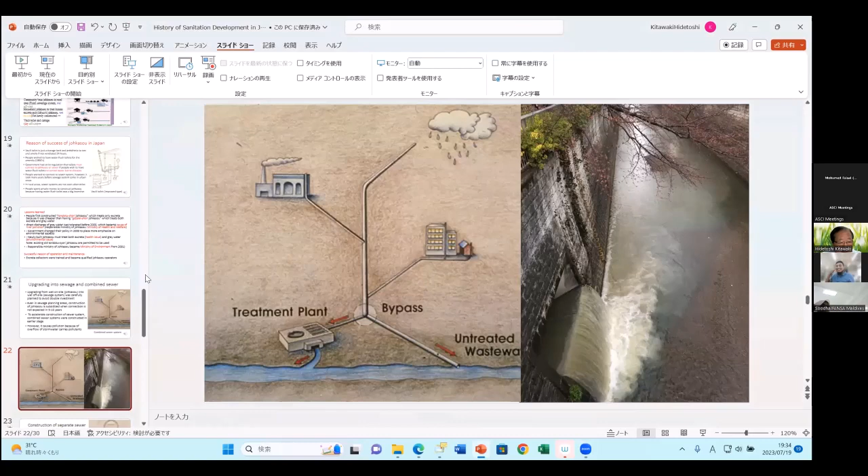Okay, thank you for the introduction. I hope everybody can hear me, right? Yeah, we can. Okay, so let me share my screen, and I'd like to make a presentation about the history of sanitation in Japan. Let's see. Yes. Here.

Okay. Now, my topic today is the history of sanitation development in Japan, and I was requested to talk something about the situation in South Asia. However, the other people already know more than me, so I add some very specific points about South Asia because I visited Bangladesh 30 times. It's a long time. First, I'd like to take the opportunity to talk about 30 minutes about the history of sanitation development. I'm from Toyo University. I was working in Tokyo University, but now I'm a professor at Toyo University. What I'm going to talk about today is these things.

Well, I'm basically a sanitary engineer. However, a sanitary engineer is talking about history, so this is a kind of strange thing. But to begin with, I'd like to talk about the historical classification in Japan from ancient times, early modern times, etc., up to now.

Then sanitation alternatives, current sanitation alternatives in Japan, and the relationship with the history. Then I'd like to talk something about the sanitation ladder and South Asia cases. Okay, now coming back to the history.

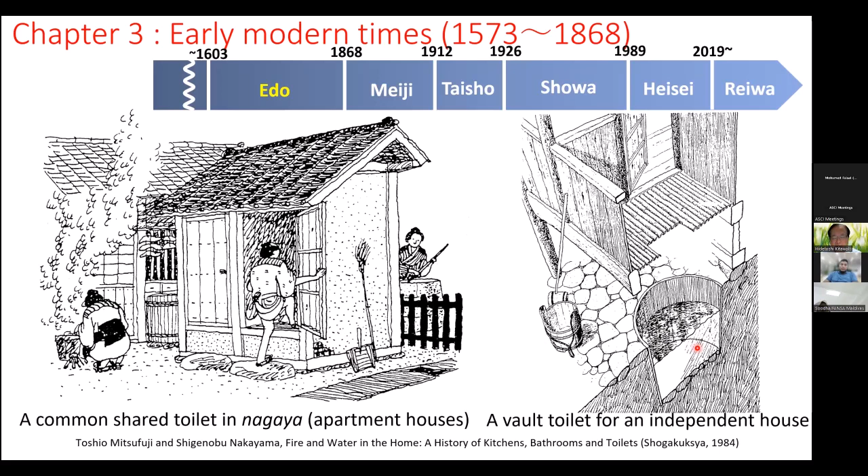And points learned from this time. Vault toilets without leaching were constructed because human excreta was a valuable commodity, as I said. Then, fortunately, there was less groundwater pollution. And traders of human excreta purchased excreta, like this. They were purchasing human excreta and bringing it by boats or other means to the farmland, and these vendors were selling human excreta. So it was a commodity.

And this is a very, very important aspect, which is leading to now. Please remember this word, jokaso. This is Japanese, and the meaning is this. Joka means purification. So means tank. And this is a purification tank of human excreta and gray water. And who maintains jokaso? This is an on-site sanitation system.

And if they introduce an on-site system, somebody should maintain it. Of course, partly the users maintain it. However, there should be some professionals who manage the on-site system. So these people, traders of human excreta, existed in large numbers, and they were trained, and they got qualifications as jokaso maintenance people, and they are maintaining jokasos up to now.

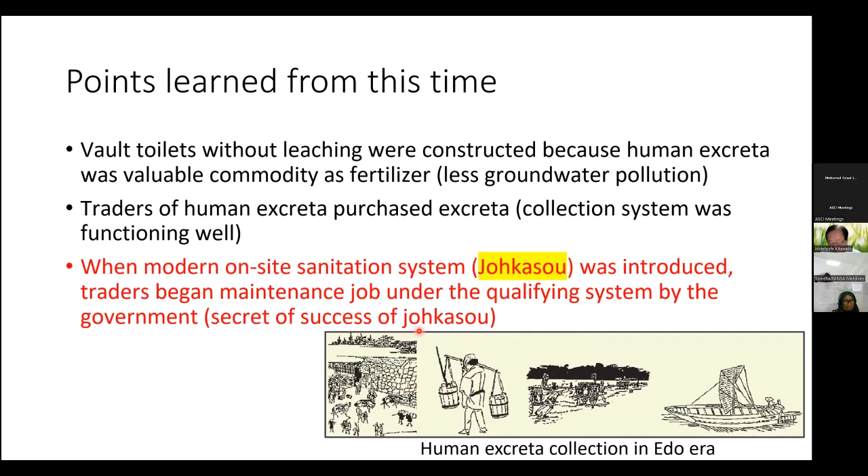Well, lessons learned. When they were using human excreta as fertilizer, of course, there was a problem of ascariasis and parasites like hookworm and other diseases. And of course, there is housefly breeding, and they transmit fecal-oral infectious diseases, etc.

So, another Japanese word, mushi, means worm. Japanese sayings include a lot of mushi. For example, mushi in the abdomen is noisy. That means something wrong may happen, etc. In this way, there are a lot of sayings, idioms, and words including mushi. That means at that time, most Japanese people had mushi in the intestine.

Okay, so this is a bad aspect of human excreta use as fertilizer. But on the contrary, the good aspect is it's a kind of recycling society, and they had a lot of fertilizer, etc. So there are pros and cons, good aspects and bad aspects. And therefore, in Japanese traditional cooking, the vegetables are all heated because the vegetables had ascaris eggs, roundworm eggs. So they had to cook thoroughly.

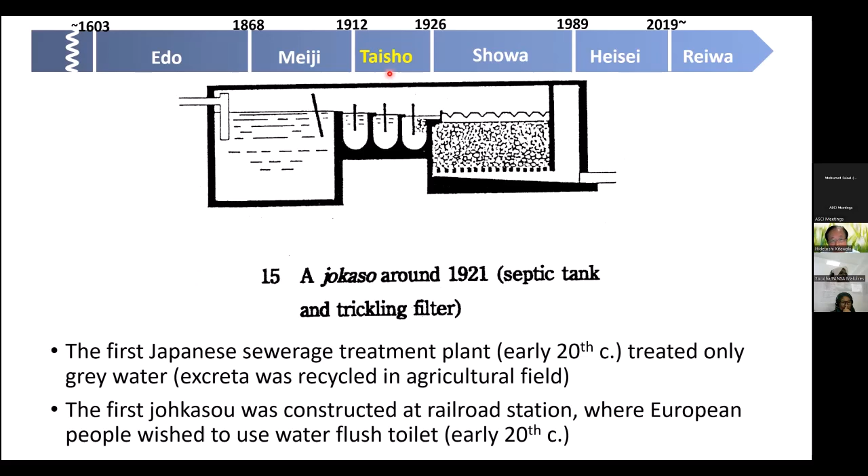At that time, Japan tried to put in some kind of jokaso or treatment facilities. This is the first jokaso, made in Tokyo Station. Japanese people were used to using vault toilets. However, foreigners, especially Europeans, liked to have water flush toilets. Therefore, the first jokaso or on-site treatment system was made in Tokyo Station with a septic tank plus a trickling filter. That was the early 20th century, in the Taisho era. Since then, the Showa era lasted 64 years.

This is the statistics. The blue one is the number of patients with waterborne diseases, and the green and dark blue ones are the cover rate of piped water supply. With the advent of piped water, waterborne disease and infant mortality decreased and cholera was under control. So it looks happy. However, if we supply water, 99% of supplied water becomes wastewater. That wastewater goes to the river and rivers are polluted. River pollution peaked around the 1970s.

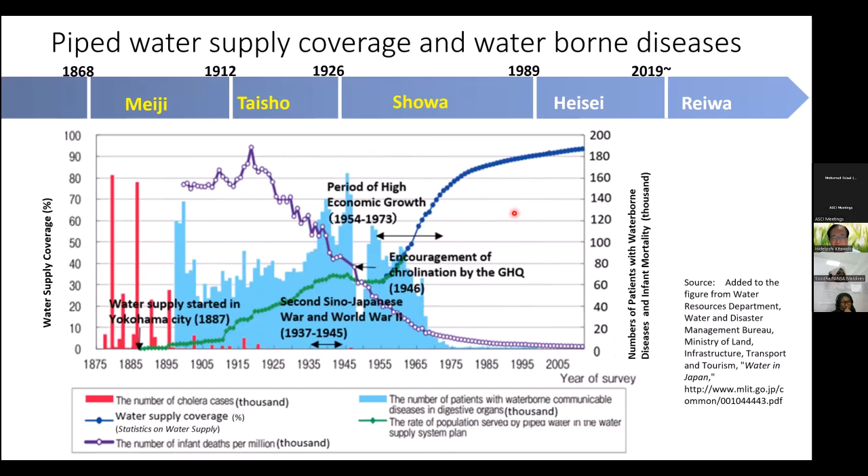After that, sewage and on-site systems were constructed, but the time lag means river water pollution. I repeat: there is a logistic curve of water supply and a logistic curve of sanitation. There is a time lag, and during it, water is polluted. Then after some time, water becomes cleaner and cleaner. This is what we call the environmental Kuznets curve: grow dirty, then clean up.

Lesson learned: why did piped water supply reduce waterborne disease? Today I'm talking about sanitation, but water supply is quite related. Piped water supply enables the use of soap. Hand washing eliminates diseases. However, to wash hands with soap, running water is very important. Otherwise, soap is very sticky and it's very difficult to use stored water for hand washing. So piped water enabled soap use, hands were cleaned, and waterborne disease decreased.

However, as I said, rivers were polluted. And when we talk about willingness to pay, water supply is okay, but for sanitation, nobody wants to pay. As for health, sanitation is just as important. Let me talk about Myanmar's success story.

I was talking with His Excellency the Minister of Health of Myanmar. He said he decided a toilet construction day, with a quota for each village to construct toilets. In villages that constructed the designated number of toilets, the government would construct drinking water wells free of charge. So wells were like a carrot in front of a horse, an incentive. The government promised to construct wells, so people wanted them.

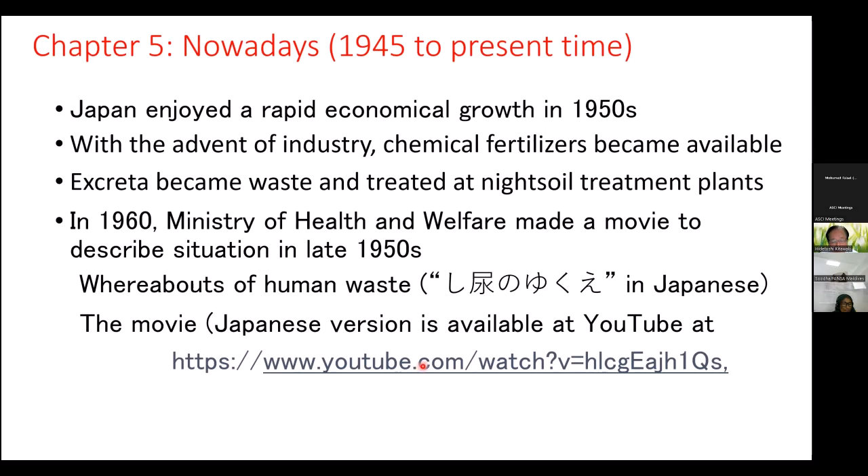Chapter 6, sanitation alternatives. I think you are experts. Classification of sanitation is wet and dry, on-site or off-site. Of course, people's first priority is wet off-site, like a sewage system. However, wet on-site, like jokaso or a pour flush toilet, is acceptable. And dry off-site is a kind of vault toilet plus treatment at a fecal sludge treatment plant.

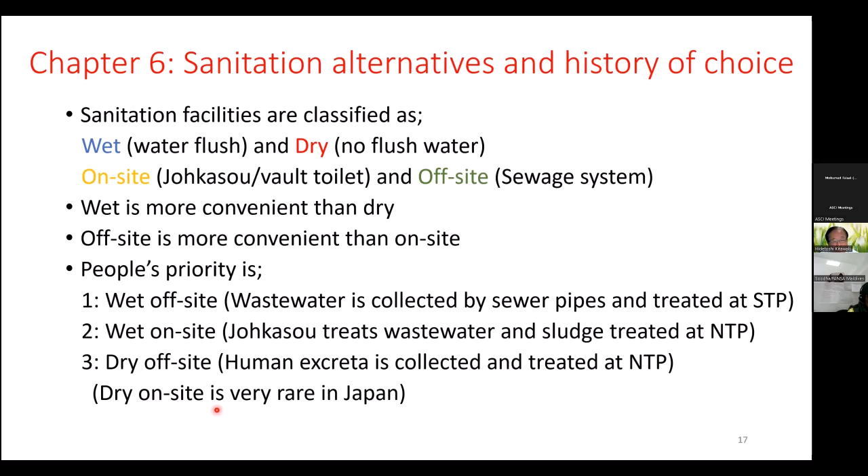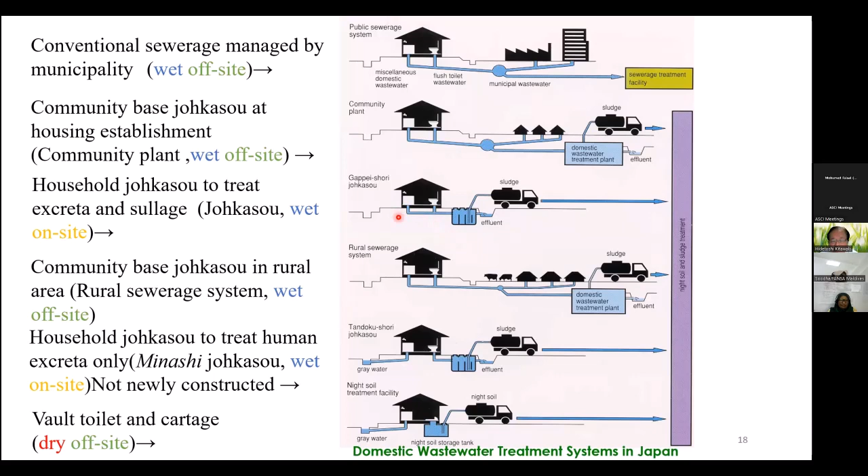But in the 21st century, the on-site sanitation system was handed over from the Ministry of Health to the Ministry of the Environment. Then they are taking care of the environment as well, and they are also treating gray water.

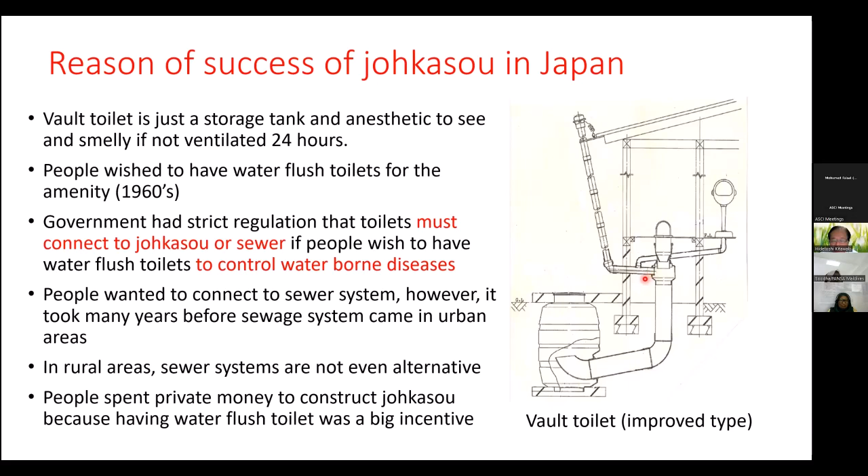This is the vault toilet. And this is the improved one, the ventilated improved vault toilet. This is not very smelly, so it can be installed inside the household. Its privacy is better, but still people wanted to have a water flush toilet. And this is the lesson learned about johkasous.

They first constructed simple johkasous which treat only human excreta, and they are still in use. So gray water from this equipment goes to the environment and pollutes it. And this one I have already mentioned: the Ministry of Health and Welfare was in charge of the on-site system, but it was handed over to the Ministry of Environment because river pollution should be controlled by treating gray water as well.

And this was also mentioned earlier. A reason for the successful operation and maintenance of the on-site system is that human excreta collectors were trained and became qualified johkasou operators. They can check the treated water quality, and they supply disinfectant, etc. Okay, let's see.

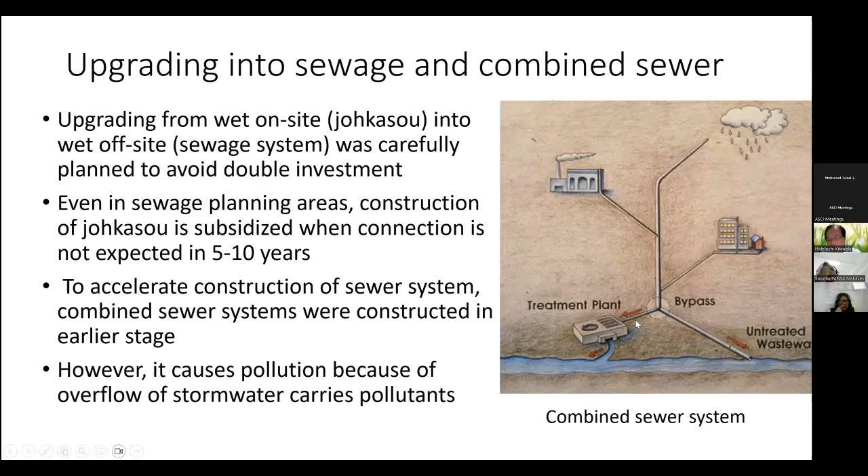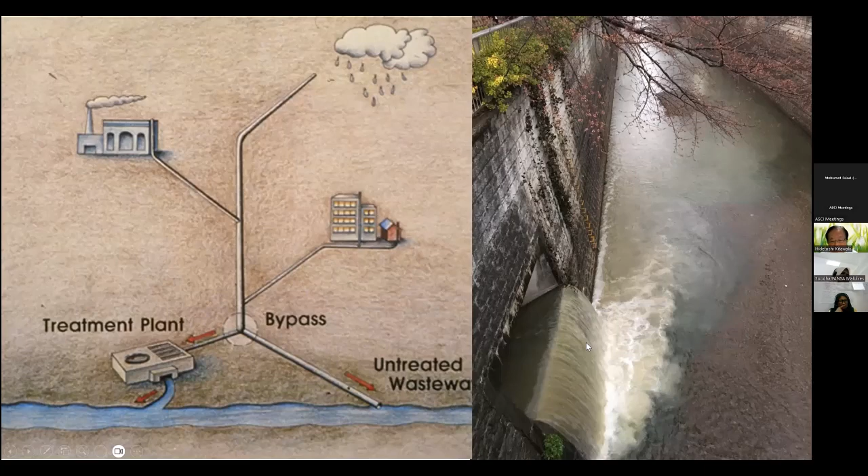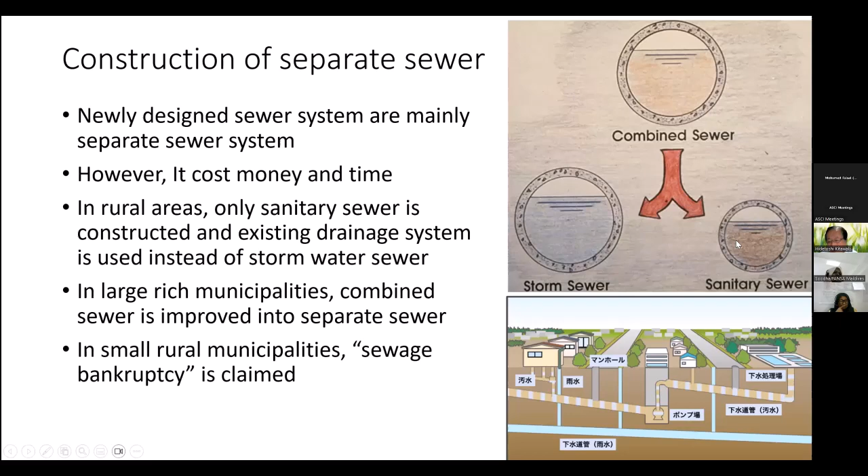Now we are facing the problem of the combined system, because it is simpler and cheaper. However, in case of rain, there is overflow from the outfall, overflowing sewage water to the river. So now Japan is trying to separate the combined sewer into stormwater and sanitary sewers, but this is quite complicated.

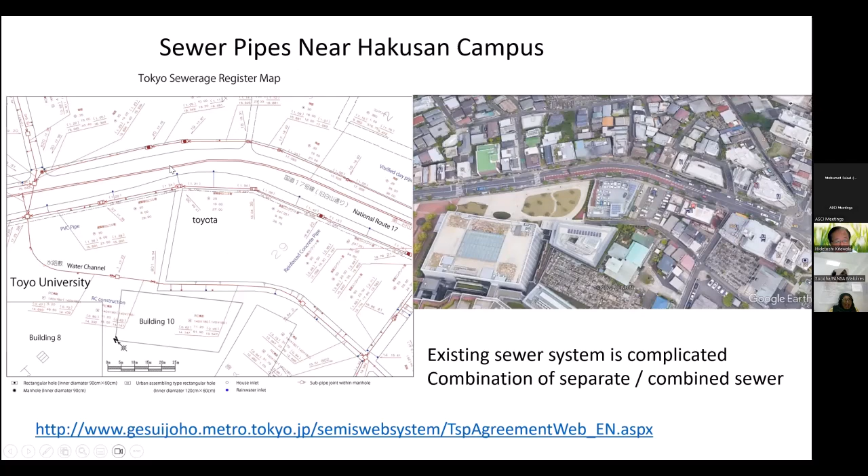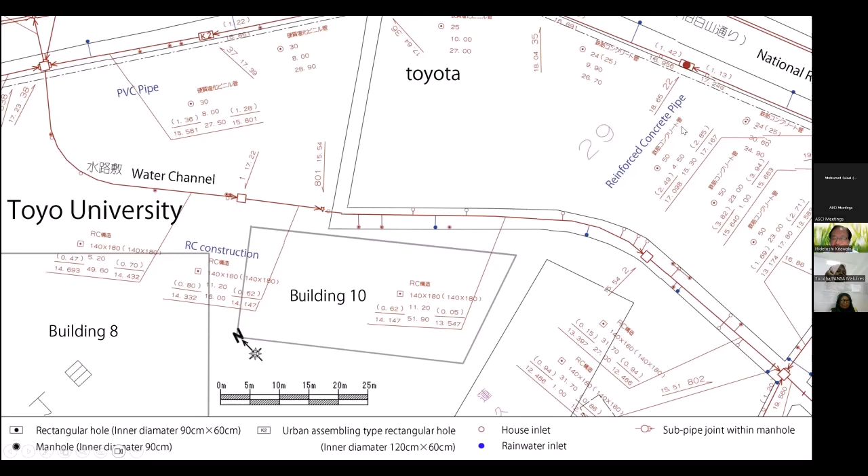Nowadays, I'm giving this lecture from this building, number 8 building of Toyo University, and just in front there is the road, and the Tokyo Metropolitan Government has such drawings showing where everything is, like manholes, etc. So we have such a system to maintain on-site and off-site systems. Nowadays we have on-site systems like johkasou, and CWIS, of course.

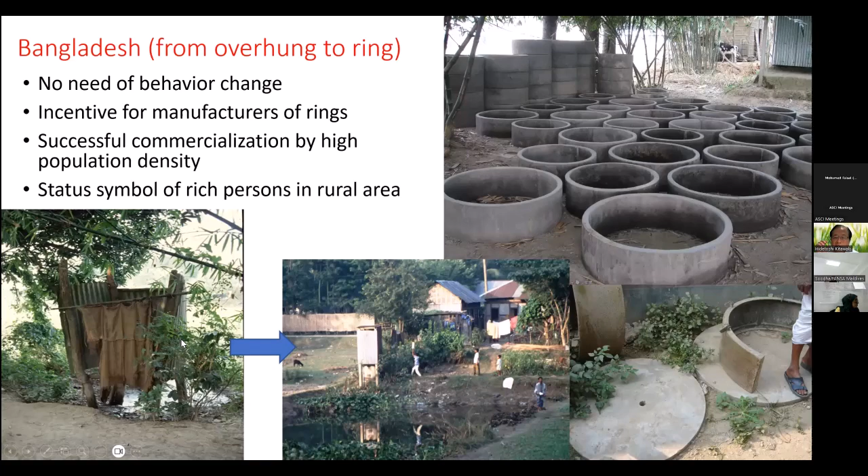This is similar to Japanese history, because we used overhung latrines long ago, but now we have on-site and off-site systems. So improvement in this way is important. Okay, now this is the end of my short presentation of about half an hour.

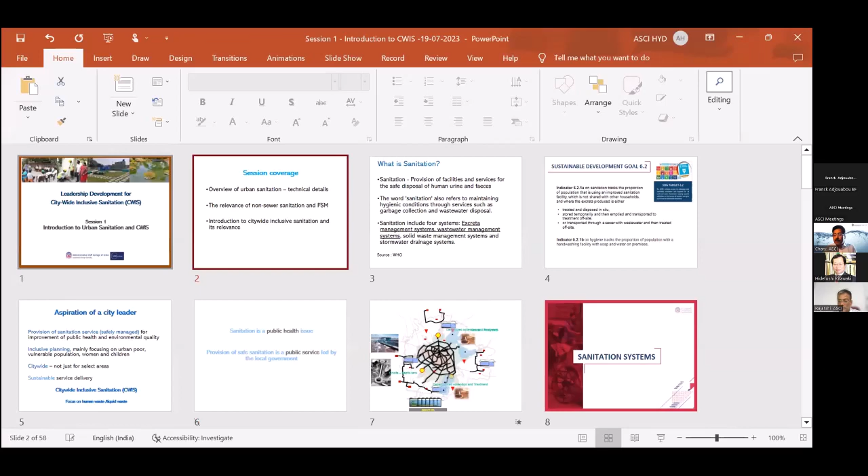So it's all the more reason we need to start understanding citywide inclusive sanitation approaches, which we are going to discuss now. The next half an hour, 40 minutes of my conversation is basically about getting the fundamentals right. Not that we don't know, but I think bringing a common understanding among all of us is what I'm going to do.

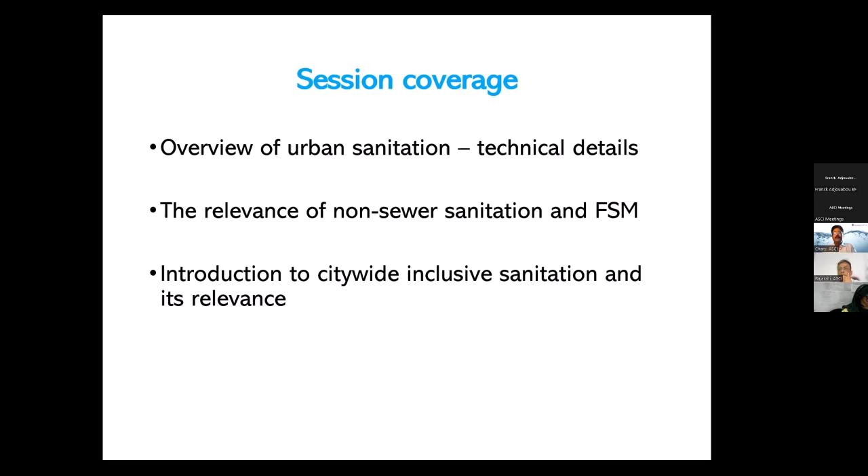I'm going to start from basics and gradually build on so that different backgrounds in this group would align themselves and we have a common understanding. As part of this session, I would be speaking about a quick overview, some technicalities of urban sanitation, non-sewer sanitation, an equivalent of Johkasou as Professor Kitawaki mentioned, fecal sludge septage management, and also I'll introduce citywide inclusive sanitation and its relevance for the countries and cities we are all coming from.

Now, what is sanitation? Sanitation is about provisioning of facilities and services for the safe disposal of human urine and feces. But sanitation also refers to maintaining hygienic conditions in our community through disposal of garbage and wastewater.

So to summarize sanitation, it has 4 elements: excreta management, wastewater management, municipal solid waste systems, and stormwater drainage. All this contributes to the sanitation agenda and to good quality public health. However, the high risk elements in this are excreta management and wastewater management, and this citywide inclusive sanitation program would focus on these 2 elements. We will not be discussing garbage management or stormwater management, except in a couple of sessions we will refer to.

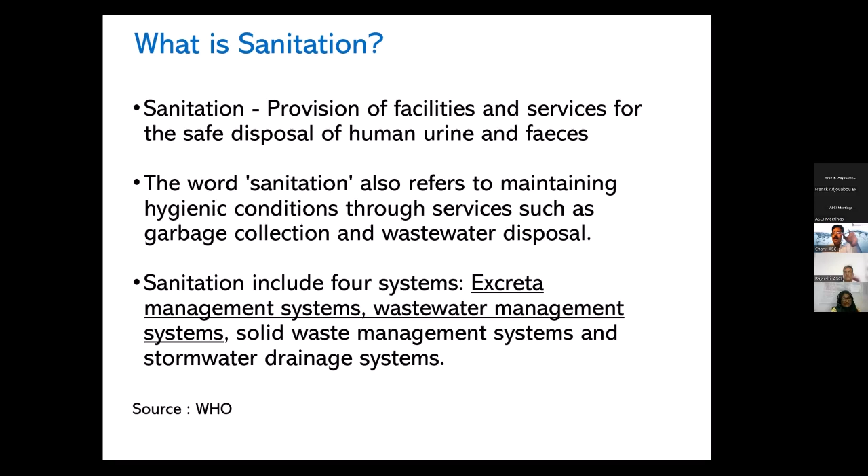The Sustainable Development Goal 6.2, which is squarely focusing on sanitation, has defined, as Professor Kitawaki mentioned, it's not just about toilet. It should be toilet in individual houses, which is not shared by different group of people. It is in the individual house that they live in, number 1. Number 2, the excreta has to be managed either in situ, treated and disposed in situ - meaning at the same location - or stored temporarily and emptied and transported to an off-site location, or transported through a sewer system with wastewater and then treated off-site.

So the Sustainable Development Goals speak of a few important points. Number 1, there has to be a toilet provision at home, not a public convenience - that is not defined as compliance. Number 2, the excreta has to be treated and disposed at the site, or stored in septic tanks or temporary storage facilities and then taken to a treatment plant like a fecal sludge treatment plant, or you put up a sewer system and treat it off-site. Any of these options can be considered as safely managed sanitation.

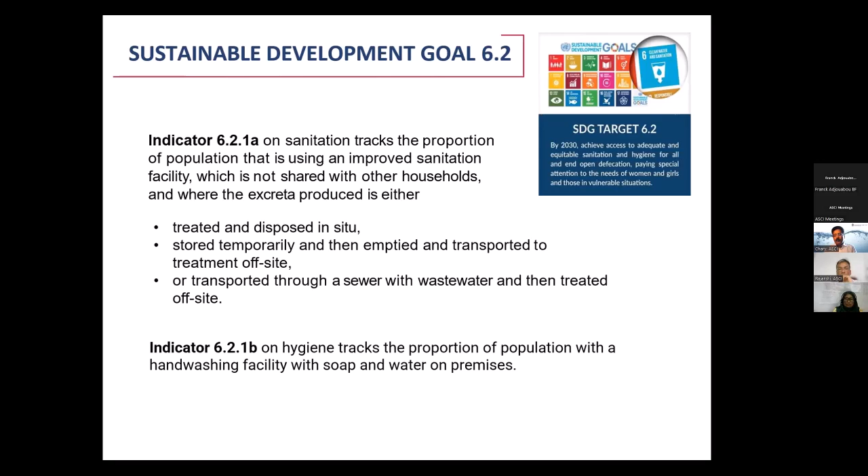So our aspiration as city managers, as sector professionals who are deeply committed to sanitation, is provisioning of safely managed sanitation for public health and environmental quality improvement, not for rich, not only for middle class, but for everyone, including the vulnerable population, the poorest of the poor, and particular focus on women and children.

And it should not be only for select pockets, it has to be citywide. If I improve the situation in one zone by providing a sewer system and ignore the rest of the area, the cities can have diseases. You may have a gold-plated solution, but if you don't cover the whole city, then the city suffers. We have in India a number of cases, pandemics and episodes, where the city may have a sewer system partially, but the rest of the area was not covered properly, hygiene was not taken care of. Hence the city suffered - whether rich or poor, everybody suffers.

Like COVID, like the pandemic we all went through - everybody had to be vaccinated so that everybody becomes safe. If half the population is vaccinated and the rest is not, everybody is not safe. So it's very, very important to look at universalizing sanitation through the citywide inclusive sanitation approach. Everybody has to be covered so that all of us would be safe. Partial coverage is not the solution. While implementing it, you can have a gradual approach.

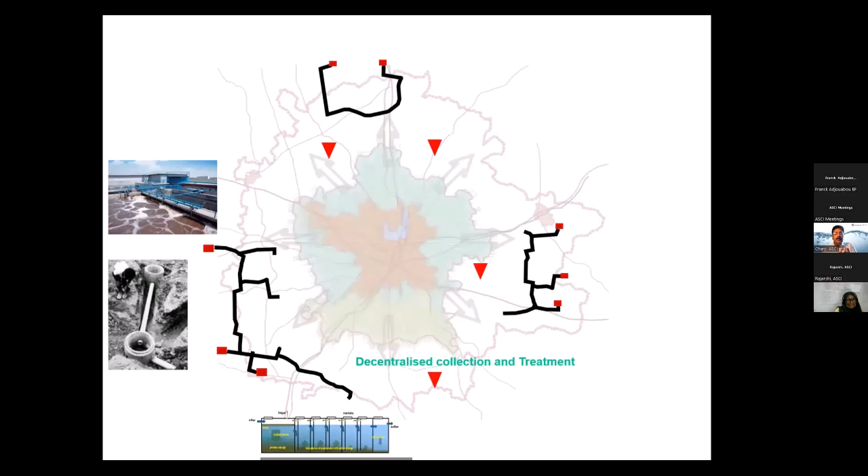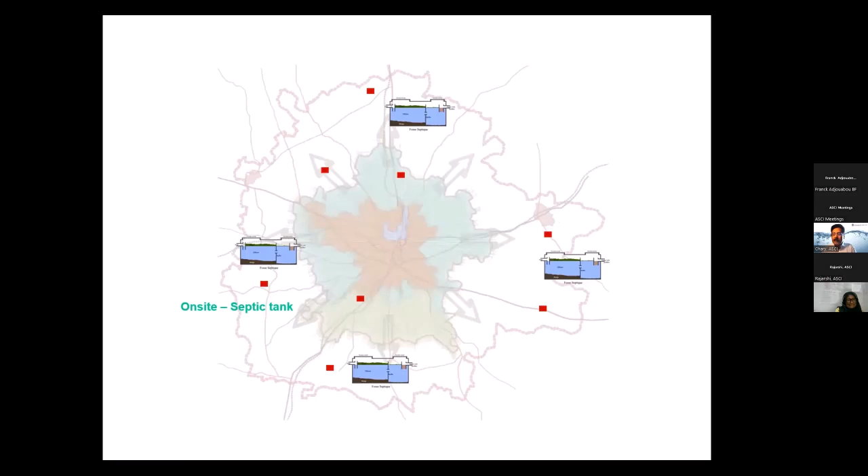So the CWIS program currently is focusing on human waste and liquid waste management. Now this provisioning of safe sanitation, as Professor Kitawaki mentioned, can be through a combination of solutions. We can provide centralized solutions, decentralized solutions in certain pockets with decentralized collection and treatment using a DEWATS system, or on-site systems like a Johkasou system he mentioned - it could be a septic tank, a twin pit toilet, or leach pits. The whole idea is to have prevention of open defecation and safe sanitation.

Sanitation improvement is not always through one technology or one system. We can use any of these systems and still get public health benefits. That is the beauty of the citywide inclusive sanitation approach. Our focus is not about technology, but about improving sanitation service delivery and public health outcomes. And that technology could be anything.

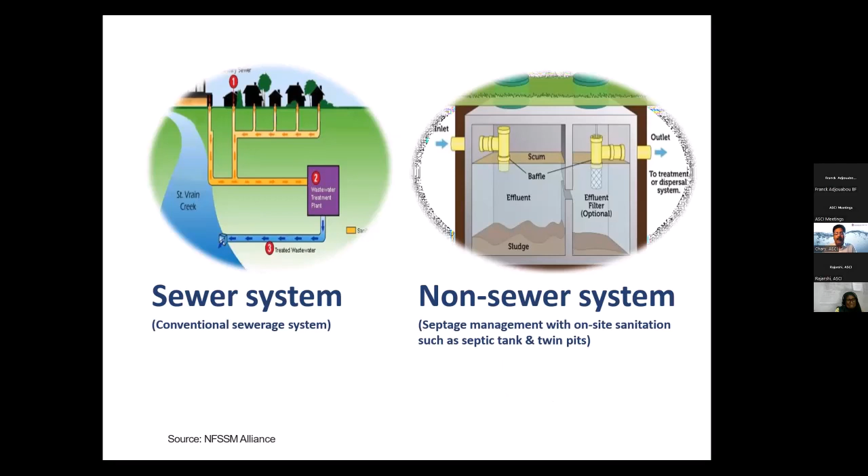It could be sewerage, it could be non-sewer systems. Now, sewerage is good, no doubt about it, but it is capital intensive. It requires a huge volume of water. How much volume do we need for sewerage? Minimum, what is the norm we use? How much water do we require? Anybody would like to comment?

To run a good sewer system, how much water do you require per capita? You need a minimum, different countries have different standards, but by and large, globally, you need about 135 to 150 liters per capita per day. You need a large volume of water to keep the sewer systems running, to flush the waste.

And that level of water availability is a big question, especially in the context of the water crisis that we have. So that's where globally, especially in our economies, the sewerage system has not expanded except in big cities. It requires a large amount of water, it requires huge capital investment. You need to dig open the road, put the pipeline, cover the pipeline, and do periodic maintenance.

You need energy to pump the water and wastewater up and down. And you need treatment systems, where again a lot of energy and cost is involved. The skill requirement is also very high. So given this situation, many of our countries could not expand the centralized sewerage system.

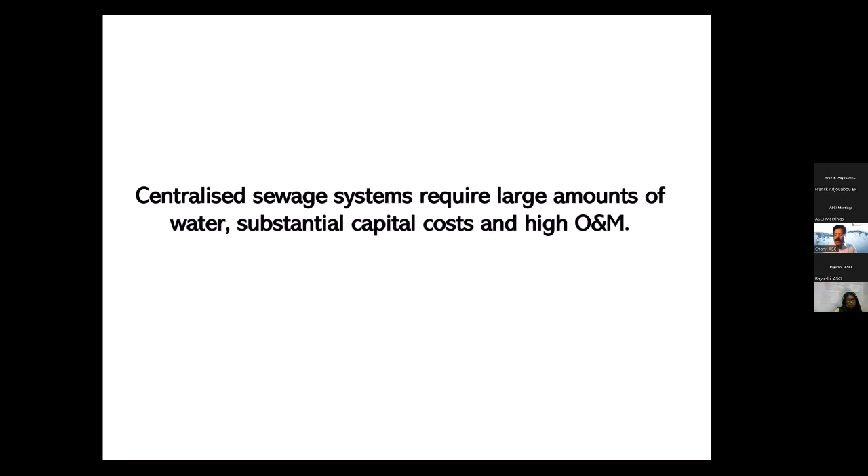That's a hard reality. Not every location, not every city, not every community has adequate water of 135 to 150 liters per capita per day. We may not have budgets, we may not have skilled human resources, and very importantly, we may not have operation and maintenance cost budgets. Given this hard reality of life, many of our countries - Bangladesh, Nepal, India, African countries - we go for what is called on-site systems.

On-site systems - in India we have what is called the Clean India mission, wherein the government has chosen a deliberate strategy of providing on-site systems for improving quality of life, preventing open defecation, and public health improvements. Because we realize that sewer systems may or may not get us the immediate benefit. We can't wait for generations, decades, to get sanitation improvement. So in India, they have chosen the path of on-site sanitation systems.

Now, on-site systems means toilets with a system of septic tanks or twin pits, two-pit leach pits, which is good. However, it has its own challenges. And that's what we mean by - is provision of a toilet good enough to get public health benefits? As you saw in the video, it's not good enough. We need to go beyond to get what is called safely managed sanitation.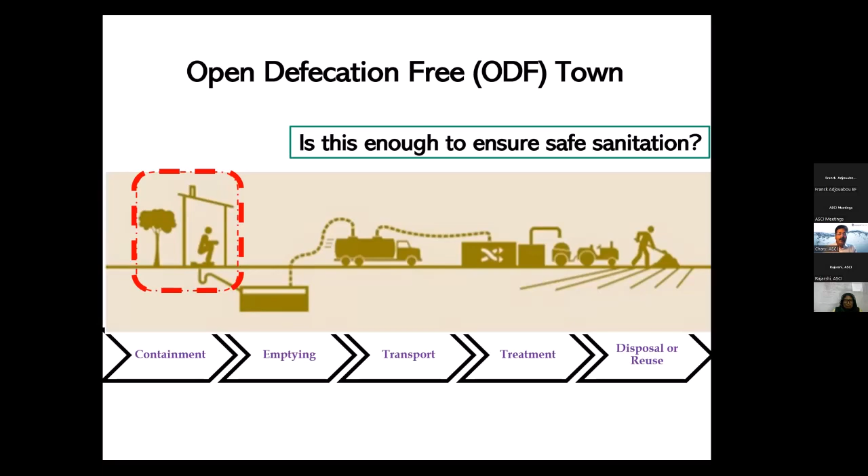So we need periodic evacuation of these on-site systems, like even Johkasou, the Japanese system, which is one of the finest technology on-site systems - they require annual desludging of the septic tanks or Johkasou system, annual desludging. They require quarterly maintenance.

So if I go back to India, then Bangladesh, and our context - the septic tanks and pit latrines have to be periodically evacuated. Otherwise, the sludge will bulk. And it has to be safely collected, safely transported, and safely disposed.

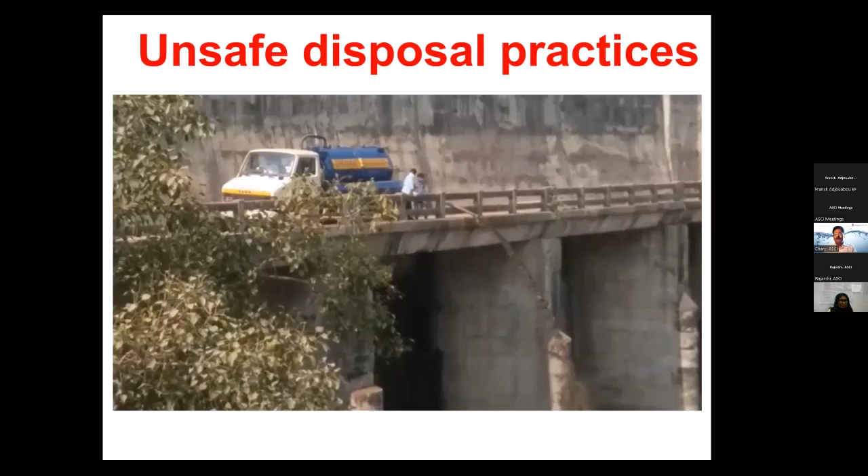This video I showed was of one of the cities we were working in. This was a pre-project situation. The private desludgers, without safety equipment, of course it is mechanized, used to collect the waste, and then this lethal septage, coming out of the septic tank, is discharged without treatment into water bodies, into open areas. And this is a common practice - at least this was a common practice in most parts of the country and the region, I would say.

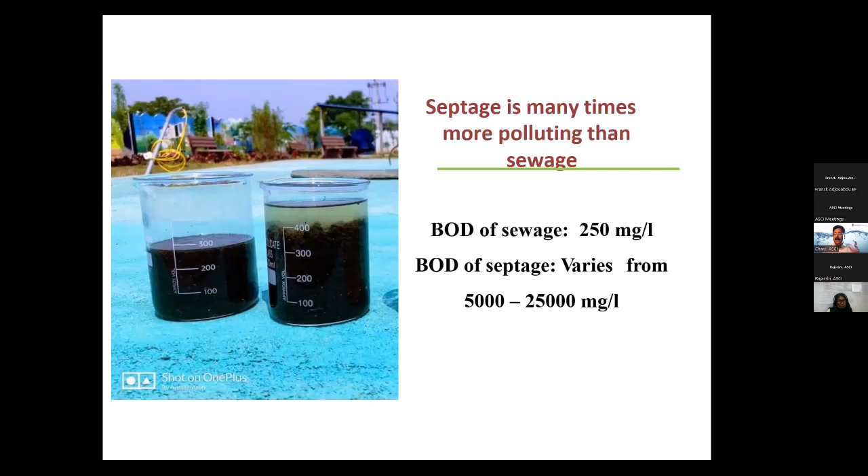The septage is much nastier than diluted sewage. Now, this has pathogens, it has organic loading, and this requires proper safe management. And that is what we are now looking at.

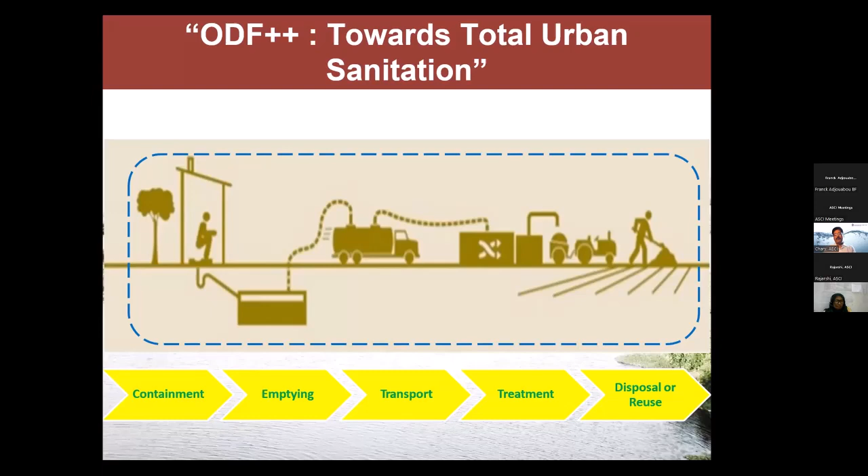While on-site systems are good, we need to look at it in totality. Hence, we have introduced what is called a comprehensive sanitation improvement program, which all of us have started now, which is about not just provisioning of toilets, but safe containment, safe emptying, safe transportation, treatment, disposal and reuse. That's the starting agenda of our conversation.

Now, some terminologies for us so that we are all on the same page. It's not that you don't know, all of us know, but one or two people may or may not be completely familiar. Hence, I'm taking the liberty of repeating.

Sewage, we use these terms very casually, and we need to be clear about it. Sewage is a mixture of wastewater from an urban activity covering both residential and commercial properties, which has both black water and gray water. Black water is human feces, urine. Gray water is like washings, bathroom washings, bathing, kitchen washings. All of them you mix through a pipe network, you take it out, and that mixture is called sewage. The conduit to carry this mixture is called sewerage network.

Now, what is sullage? Sullage is nothing but gray water, except night soil, except black water. So sullage is wastewater from bathing, laundry, food preparation, cooking, and other personal and domestic activity. This is called sullage. Sewage has both black and gray. Sullage is only gray.

What is fecal sludge? It's an undigested sludge collected from a pit latrine or a leach pit. The water gets leached into the ground. There's a bit of sludge, and the sludge gets accumulated, and then it has to be periodically taken out, and that sludge is called fecal sludge. What is septage? It's a mixture of wastewater and sludge removed from a septic tank during the cleaning operation. From a septic tank you evacuate septage, and the fecal sludge comes out typically from pit latrines or leach pits. These are all used by all our countries for various sanitation toilet provisioning.

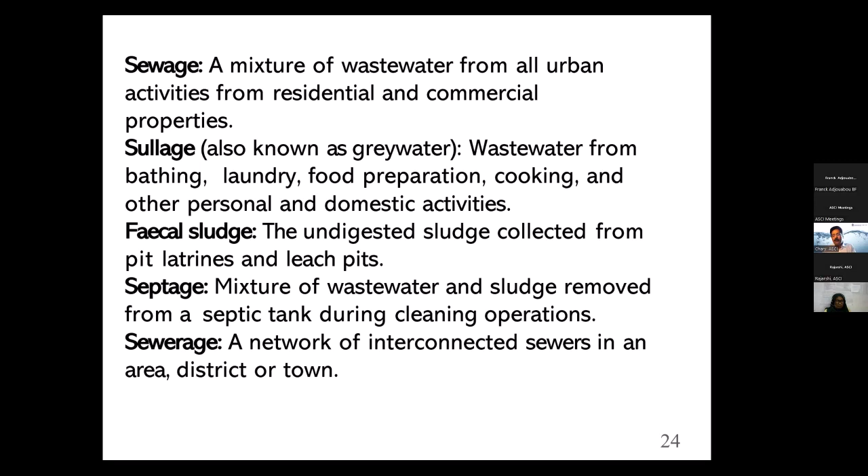And sewerage is nothing but an interconnected sewer network of pipes to push the used wastewater, sewage, from location A to location B, and at location B, we treat it and then discharge into water bodies or downstream. These are the terminologies that all of us should be aware of.

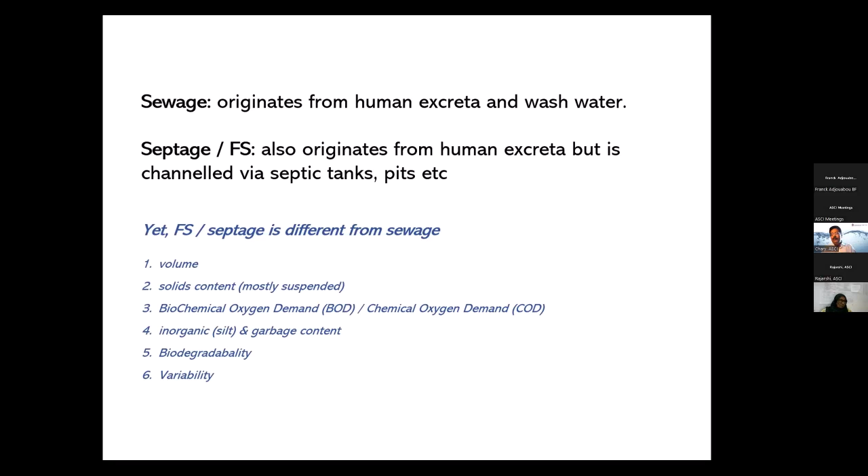Now, very important to understand that sewage originates from human excreta and wash water; septage and fecal sludge come from human excreta, but are channeled via septic tanks or pits. That's why it is concentrated. The characterization is different from sewage. The solid content is very different. The BOD, COD is different. The biodegradability is different. And the variability is also different. So the conventional sewage treatment plant may or may not take as it is the septage or the fecal sludge. When it comes to technology sessions, we will discuss some of those things.

I just want to inform you that even a septic tank is a treatment infrastructure. It is not a holding tank. It is an anaerobic digester. It is like our stomach, continuously digesting. It's an anaerobic digestion. So a septic tank is not bad, but it's not good enough, of course. The outlet of the septic tank should be taken to what is called a soak away or a soak pit. Without that, the septic tank is useless. Septic tank requires a soak away.

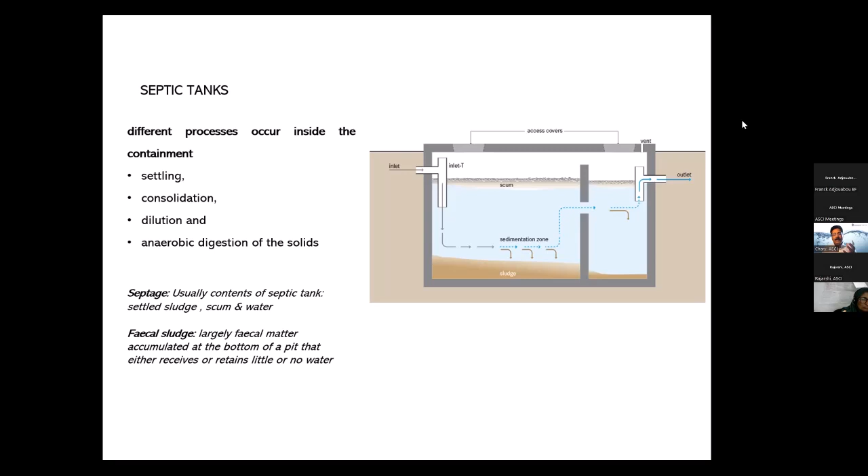But in most of our countries, the septic tank is built and the outlet is connected into a drain which carries a lot of pollution. So septic tank, let me repeat, it is a treatment infrastructure. It has to be designed well. The way a sewage treatment plant is designed well, the way a fecal sludge treatment plant is designed well, septic tanks also have to be designed systematically.

It is in this context, most of our economies, most of our countries, most of our cities, recognizing the challenge of the current sanitation situation, have introduced what is called a regulatory framework or policy frameworks for managing sanitation. We can't allow it the way it is going, where the septic tanks are not designed well. The private operators, unregulated operators, are taking the septage and dumping wherever they want and polluting the waters. There's no training. There is no medium-term planning. There's no financial allocation for sanitation.

So given these ground level situations, most of our countries, Pakistan, India, Nepal, Bangladesh, African countries, all of us in some form or the other, have started thinking about what we call a policy and regulatory framework for on-site safe management of fecal sludge and septage. What are the main components? Every country, every context could be different. What are the main components that we need to ensure for improving public health, for safe management of fecal sludge and septage?

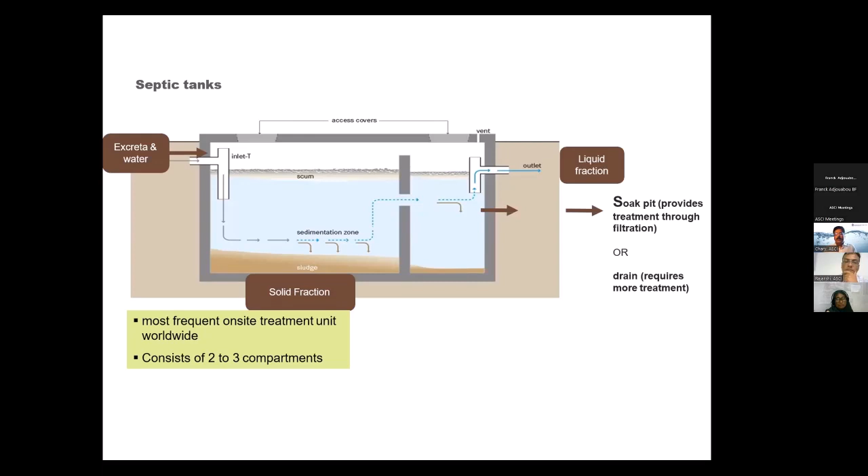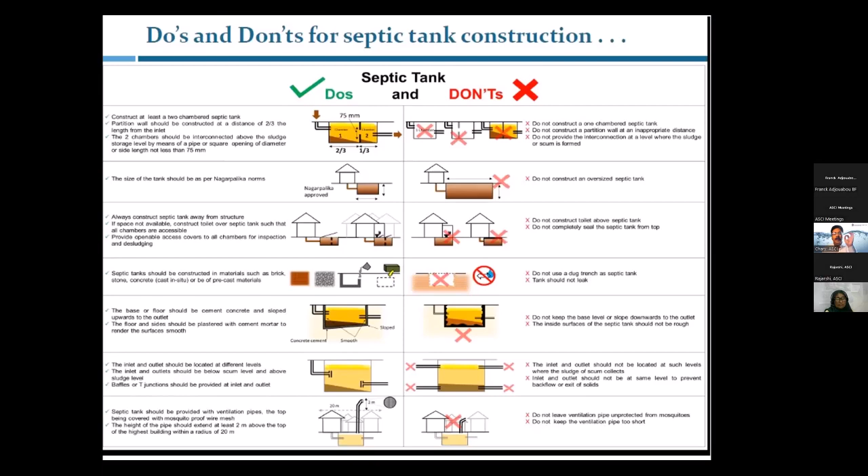The first and foremost thing in the regulatory framework is design and construction of septic tanks as per the design intent. In fact, in many of our cities now, we have do's and don'ts to communicate to citizens how to build a septic tank, because it is often viewed as a private activity. We hire a mason, we hire a plumber. So we need this communication to plumbers and masons, and training, so that we get quality on-site systems like the way the Japanese have done it.

The second important thing as part of the regulation is empanelment of the masons who construct septic tanks, and training and certification. This is a super important step. If you ask Professor Kitawaki, he will speak about it, and Professor Hashimoto-san will also come later. Only empaneled people can handle Johkasou, and they are trained and certified. In the CWIS programs in India, we have made it mandatory that masons building on-site systems are empaneled, certified and trained. This is the second important component of FSSM regulation.

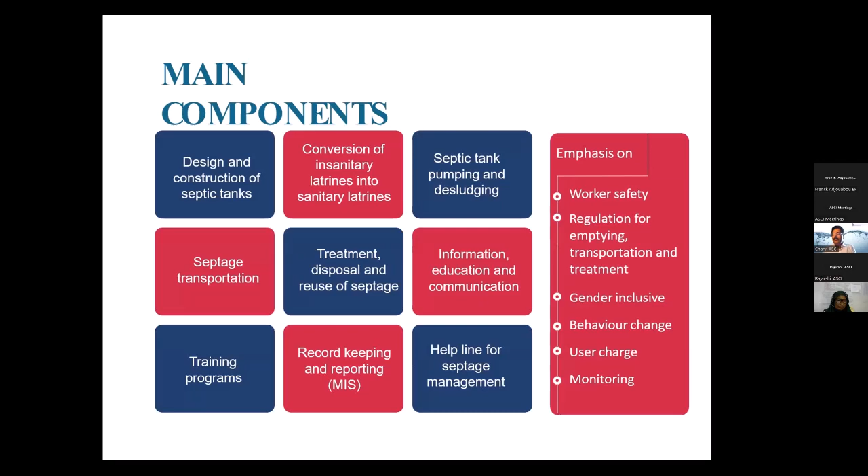The third important component of the regulation is empanelment of the desludging operators, because this is a high-risk activity from a health point of view, because people sometimes enter septic tanks and get exposed to toxic gases. So they have to wear personal protective equipment, gumboots and safety gear so they are not exposed to disease burden. Hence, we empanel desludging operators and ensure they are trained in the usage of PPE and safety precautions. This is the third important step.

So we discussed the toilet infrastructure. Now we are looking at the desludging processes. These are all the standard operating procedures of how to do desludging. If anybody is interested, feel free to reach out to us, reach out to Josna, Dr. Banerjee. We will share some of the material that we have.

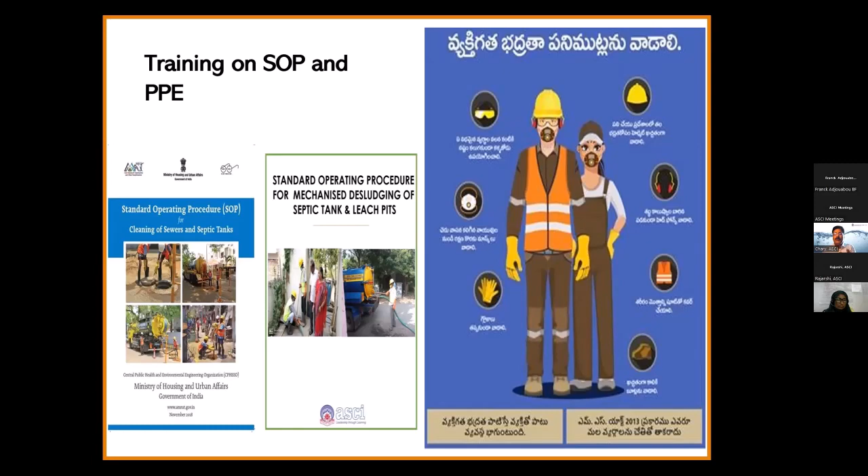Many of you have it, but if you want some additional material on SOP, standard operating procedures for desludging, for transportation, all of that is readily available, including visuals. The collaterals for communication are also readily available. We'll be very happy. As a part of this regulation, in India now we insist on GPS tracking.

Why is this important? This is important because the private desludgers can desludge and take it anywhere and everywhere they want without going to the treatment plant. So we need to track the vehicles. So the city authorities now are insisting to have GPS for the empaneled or the licensed vehicles that the city has. So this is another important component of the regulatory framework.

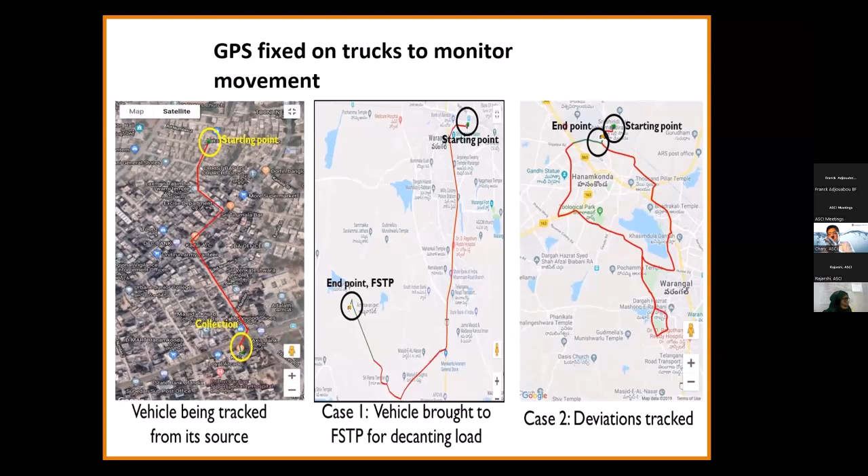So what are we doing? Construction regulations, desludging regulations, transportation related regulations. Then tracking it. Because it has to be desludged once in 3 years, you need to keep the data. So the mobile apps are deployed so that we punch in the data, and then like the way COVID alerts are given to us for the second dose, third dose, the city should get an alert that after 3 years, your septic tank is due, on-site system is due for desludging.

So for that, you need to track the desludging details as part of your good operating practices or good implementation of the FSSM program. After we transport it safely, where do we take it? We have to have a treatment infrastructure. We will discuss all of this in detail, but the treatment could be in an existing sewage treatment plant if you have, or it could be an independent septage treatment plant.

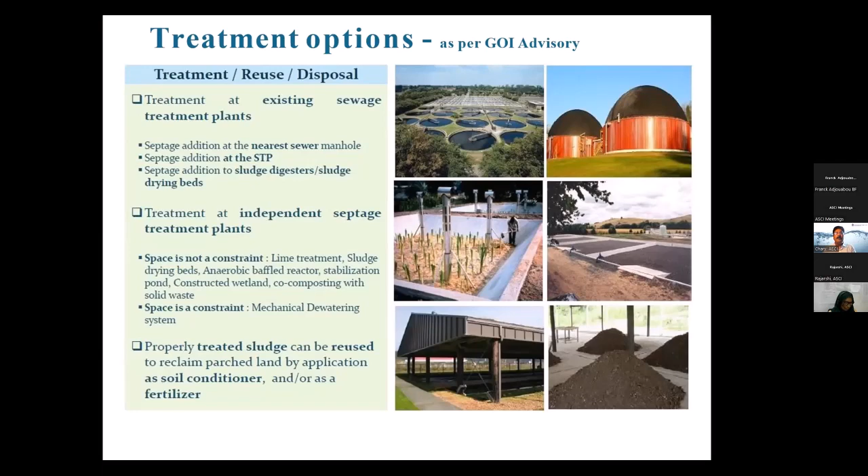So if you have an STP in your town, in your city, you can do what is called a combined treatment, where this septage has to be taken to the STP. We should dilute it. We have to have controlled conditions in which you can use the sewage treatment plant to treat the septage. However, if you don't have it, you need to set up a standalone or an independent FSTP. And there are different technologies. This is one of the technologies we have used.

This is supported by the Bill and Melinda Gates Foundation to begin with, but we have expanded to almost 142 municipalities. This is a thermal-based system. It is through a pyrolysis method where the pathogens will be neutralized at a very elevated temperature of 600 to 700 degrees. And then it converts into biochar, that is nothing but a completely burnt out material. And then this burnt out material is used as a soil amendment or a soil conditioner.

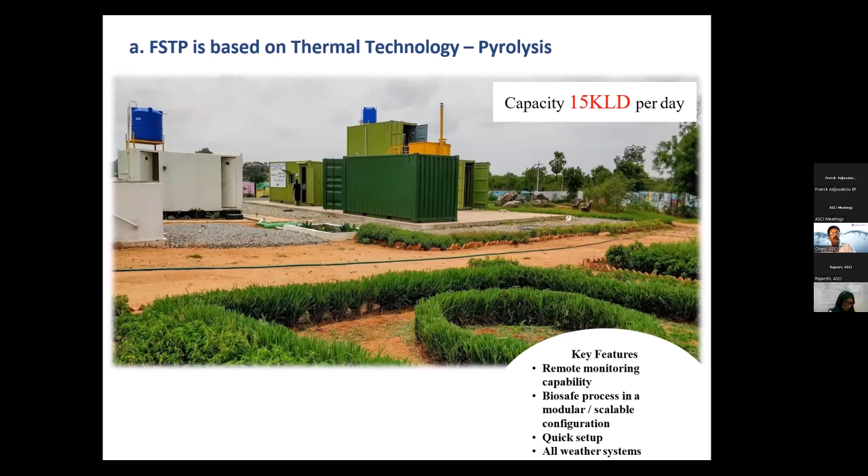This plant is totally biosafe. We have implemented it in one of the towns in Warangal. As a part of this program, once you come here, we will have a lot of these visits where you can see some of these facilities. This is another technology we have introduced. We have about 6 different technologies in the state of Telangana where we work.

This is a geobag technology wherein the septage is pumped into these bags after a bit of homogenization, and then the solids are retained in the bag, the liquid oozes out, and the liquid goes through liquid treatment. The solids stay in the bag for almost 40 to 45 days. You open up the bag, and then these solids are taken, and they will be subject to solar pasteurization, and then it can be used as a sort of agriculture application. This works very well. There are a lot of projects of this nature. It doesn't smell at all, contrary to the belief that we have.

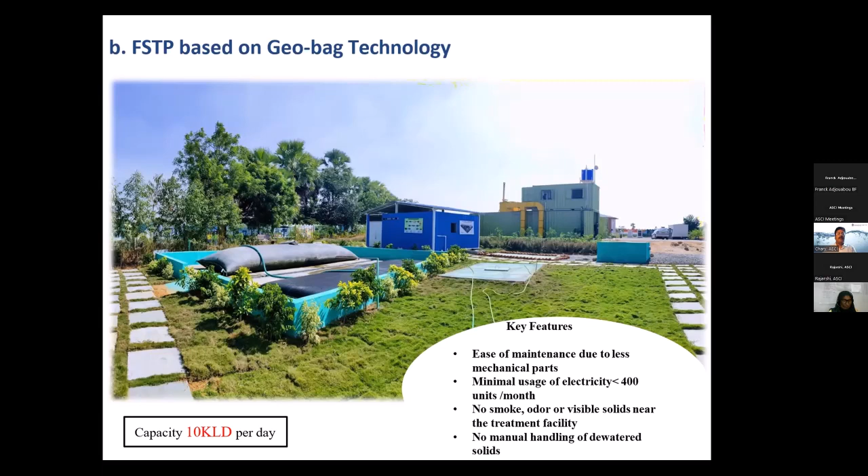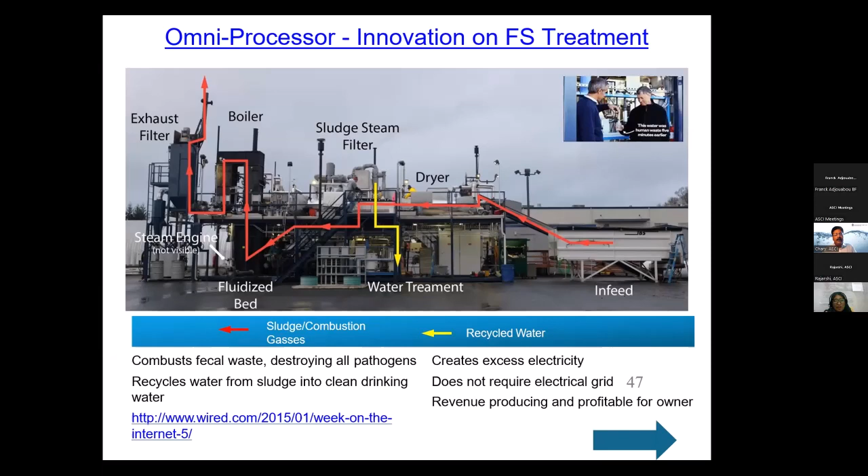So I'm not going to bore you with all these technologies, but different technologies are available. Co-treatment plants are implemented. Combined treatment in the STP is also implemented. There are advanced versions where the energy is recovered. This is, I think, in Senegal, where the liquid is treated through membrane technology. And in fact, there's a famous picture of Mr. Gates drinking the water coming out of the fecal sludge treatment plant. So there are advanced versions implemented all over the world right now, and we have personally implemented many of these technologies.

In all this, the behavior change communication, information education communication is super important. Citizens would not like to desludge once in 3 years or once in 2 years. We need to educate them, we need to alert them, we need to inform them, and if required, we need to strongly regulate. This is also integral to the regulatory framework that we are talking about.

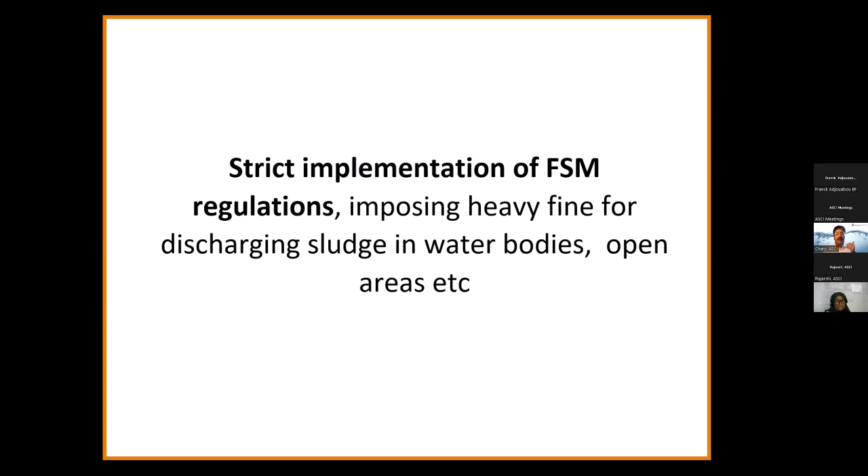So different ways of presenting, communicating, and this is very, very important to inform the citizens about the ill effects of unsafe sanitation or bad fecal sludge septage management practices. In fact, it's equally important to have strong regulations, heavy fines; penalties have to be imposed. It requires this after a certain level of awareness. Otherwise, without this sort of regulation, some of these public health benefits cannot be accrued only through awareness.

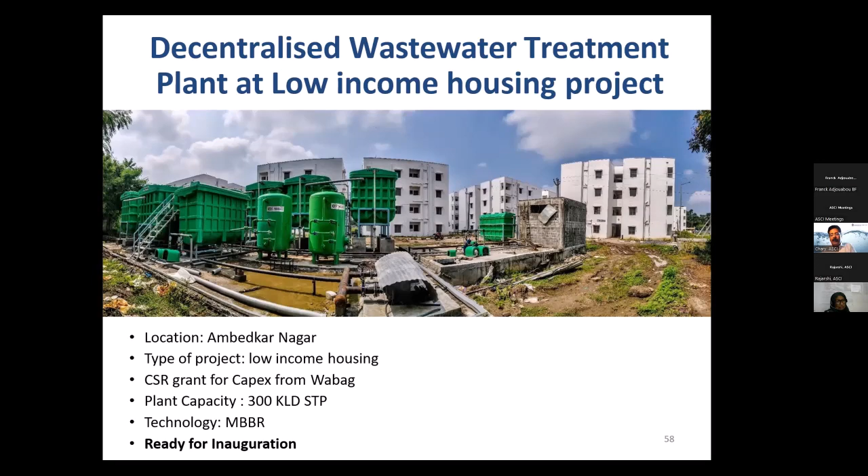So what are we doing with this? We are promoting what is called decentralized on-site grey water management systems through a regulatory framework. There is a building you can see at the back. It's a low-income housing. The wastewater coming out of this low-income housing, based on the hydraulics, this treatment infrastructure is installed there. A very compact system, and it gets treated, and then we can recycle the wastewater for gardening and other applications. This is another fantastic one, it's a Johkasou system of 50 KLD capacity.

This is a girls' hostel. Now in this girls' hostel, the wastewater has to be treated. So this is a Johkasou system we have introduced, totally under the ground, and it treats, and then it can be used for gardening applications.

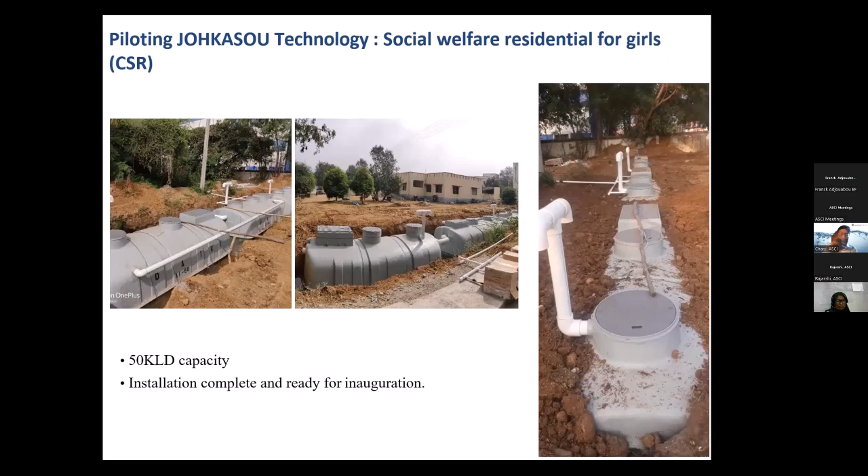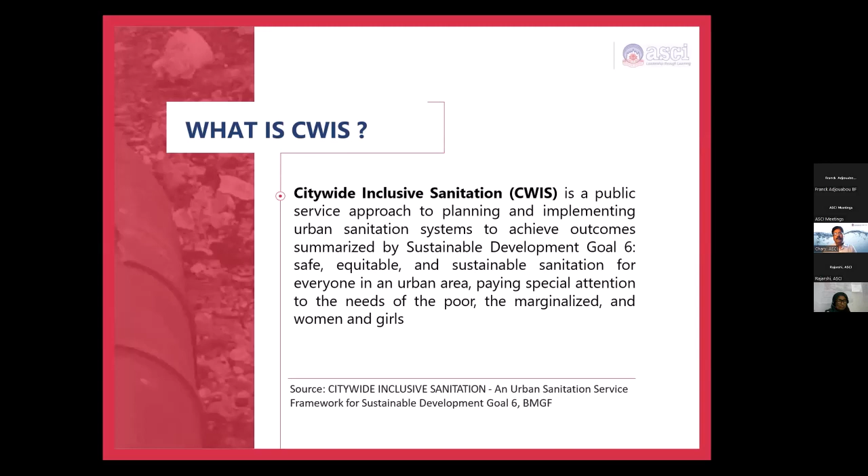So in summary, what is CWIS? What is citywide inclusive sanitation? Citywide inclusive sanitation is not about on-site system or off-site system. It is about how sanitation as a public service should be planned and implemented for achieving public health in a safe, equitable, and sustainable manner. It means that we need to ensure that the sanitation provision is equitable, it is safe, it is sustainable, not only environmental sustainability, but financial sustainability.

And to get all this, friends, we need a responsible organization. Who is accountable for sanitation is a big question now. There is a very clear accountability for garbage management in urban areas, but there is no accountable structure, responsible entity with staffing, with funds, with functionaries for human waste management. It's all piecemeal. So citywide inclusive sanitation is nudging city governments not only to look at technologies, provisioning the on-site systems, ensuring financial sustainability, but also create human capital in the service delivery agency to deliver it on a continuous basis.

This is a typical framework that we use for citywide inclusive sanitation, which looks at equity, safety, and sustainability as goals. And to get these goals, you need a responsible organization, a very clear, well-defined accountability to this responsible organization, and resources to deliver it, both financial and human resources. Just visualize yourself in a municipal urban context. Municipal solid waste management has a responsible organization with sufficient budgets, with clear accountability, but not human waste management, which is much riskier for public health.

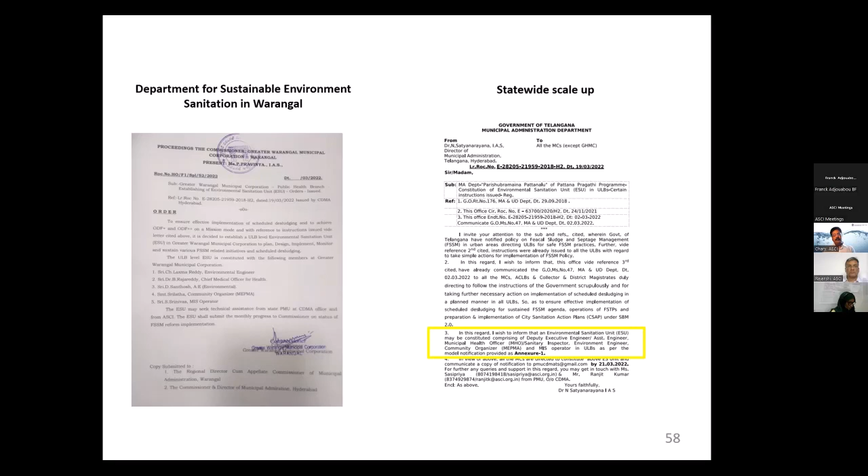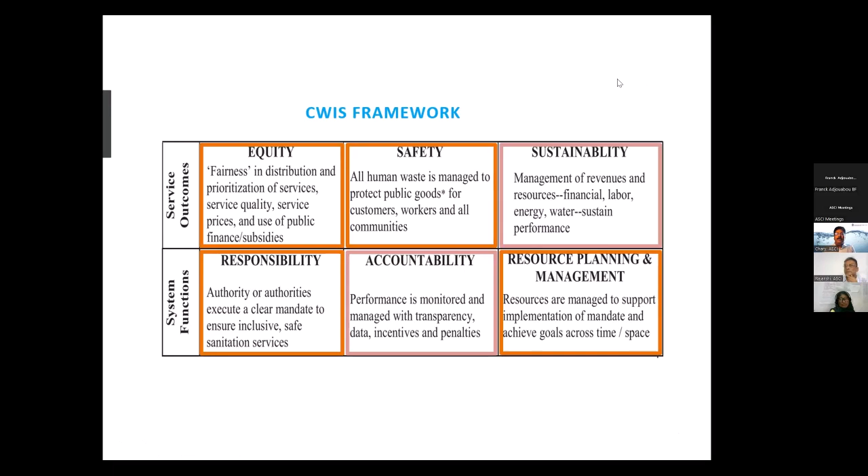I hope I tried to communicate what on-site sanitation is all about, why we need to look at both black water and grey water for public health, why the sewer system is not the only solution. We need to look at alternate approaches as per our budgetary requirements, as per our water availability requirements, as per our capacity requirements, but with a common agenda of improving quality of life, improving public health standards.

The journey could be in different ways, but the goal has to be the same, which is good livability and good public health. And that's why all of us in some form or the other, if you go to your respective departments, we are all called public health officials. There's a public health engineering department, public health officer. So sanitation provision is public health, and it requires a comprehensive citywide inclusive sanitation approach to deliver it on a continuous basis. So I'll stop here.

I think I'm just in time. On time, 5:23, yes. We have some time, sir. I'm just in time for any other questions. Any questions, it doesn't matter whether it is a good question, bad question, foolish question. My talk could be foolish. You can say anything and get away. But I will not let you get away without clarifying. Over to you.